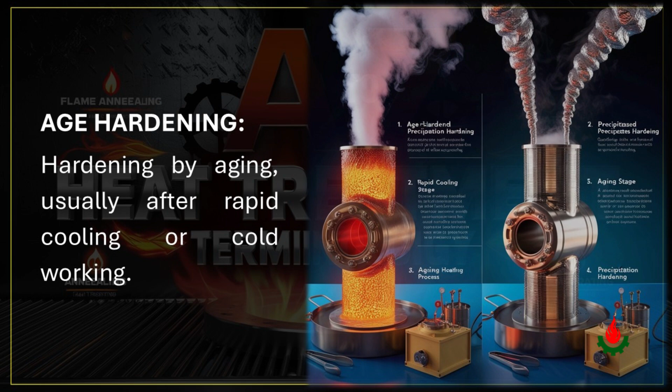Age hardening: hardening by aging, usually after rapid cooling or cold working. Age softening: spontaneous decrease of strength and hardness that takes place at room temperature in certain strain-hardened alloys, especially those of aluminum.

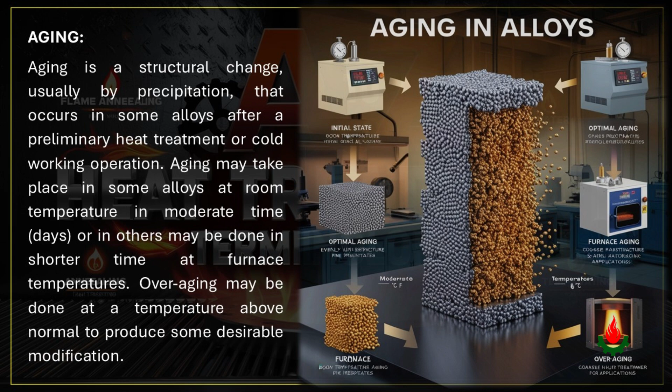Aging is a structural change, usually by precipitation, that occurs in some alloys after preliminary heat treatment or cold working operation. Aging may take place in some alloys at room temperature in moderate time, days, or in others may be done in shorter time at furnace temperatures. Overaging may be done at a temperature above normal to produce some desirable modification.

Air hardening steel: a steel containing sufficient carbon and other alloying elements to harden fully during cooling in air or other gaseous mediums from a temperature above its transformation range. The term should be restricted to steels capable of being hardened by cooling in air in large sections, about 2 inches, 50 millimeters, or more in diameter.

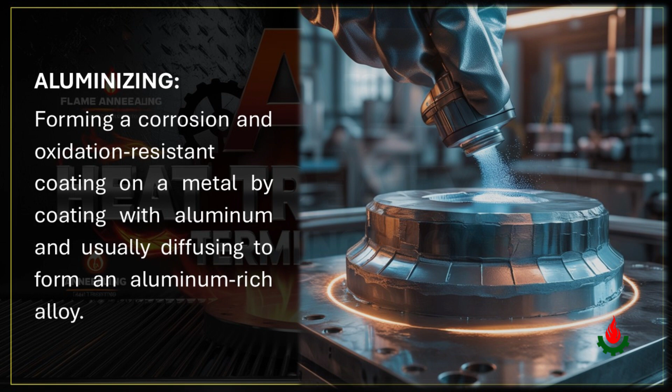Same as self-hardening steel. Aluminizing: forming a corrosion and oxidation-resistant coating on a metal by coating with aluminum and usually diffusing to form an aluminum-rich alloy.

Annealing: a very general term describing the heating of metal to a suitable temperature, holding for a suitable time, and cooling at a suitable rate to accomplish the objective of the treatment.

Annealing may be done to: A. Relieve stresses. B. Induce softness. C. Improve physical, electrical, or magnetic properties. D. Improve machinability. E. Refine the crystalline structure. F. Remove gases. G. Produce a specific microstructure.

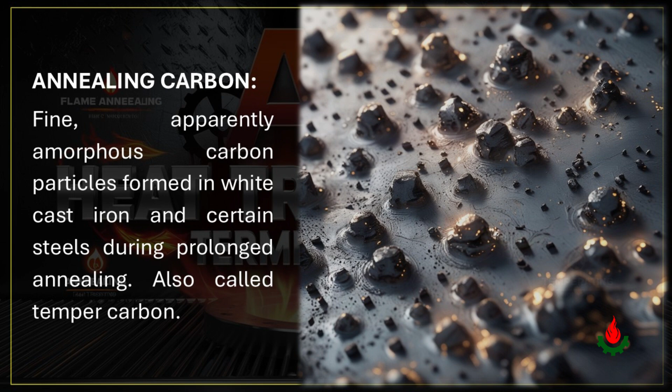Annealing carbon: fine, apparently amorphous carbon particles formed in white cast iron and certain steels during prolonged annealing. Also called temper carbon.

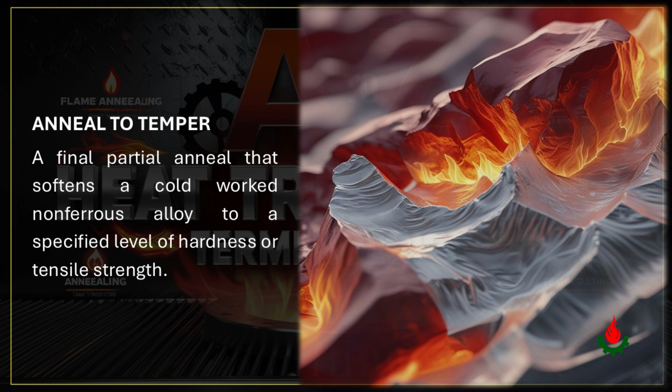Annealing twin: a twin formed in a crystal during recrystallization. Anneal to temper: a final partial anneal that softens a cold-worked non-ferrous alloy to a specified level of hardness or tensile strength.

Anodizing: the production of an oxide layer on aluminum alloys. The process is electrolytic, a typical electrolyte being sulfuric acid. Treatment at room temperature produces thin, decorative layers with some corrosion protection.

Treatment at 0 degrees Celsius produces hard, thicker layers, up to 100 micrometers, with wear resistance. They can be post-sealed to give improved corrosion resistance.

Artificial aging: aging above room temperature. Compare with natural aging. Athermal transformation: a reaction that proceeds without benefit of thermal fluctuations, that is, thermal activation is not required.

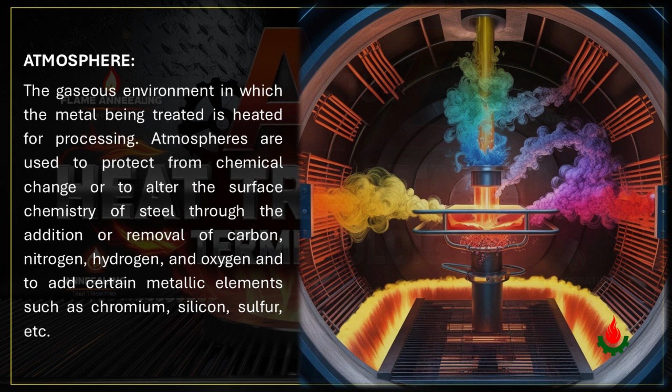Atmosphere: the gaseous environment in which the metal being treated is heated for processing. Atmospheres are used to protect from chemical change or to alter the surface chemistry of steel through the addition or removal of carbon, nitrogen, hydrogen, and oxygen, and to add certain metallic elements such as chromium, silicon, sulfur, etc.

Austempering: a heat treatment for ferrous alloys in which a part is quenched from the austenitizing temperature at a rate fast enough to avoid formation of ferrite or pearlite, and then held at a temperature just above MS until transformation to bainite is complete.

Austenite is the name given to any solid solution in which gamma iron is the solvent. Austenite is a structure name and means nothing as to composition. Austenite is the structure from which all quenching heat treatments must start, which is characterized by a face-centered cubic structure.

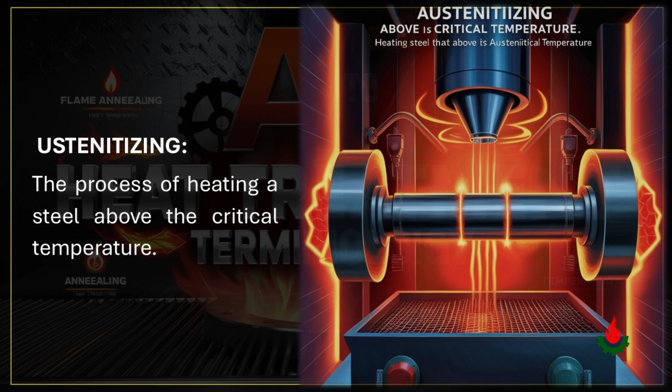Austenitizing: the process of heating a steel above the critical temperature. Bainite: the product formed when austenite transforms between 450 degrees Fahrenheit and 900 degrees Fahrenheit. Bainite is an acicular aggregate of ferrite and carbide and varies in hardness between Rockwell scale 30 and 55.

Baking: 1. Heating to a low temperature to remove gases. 2. Curing or hardening surface coatings such as paints by exposure to heat. 3. Heating to drive off moisture, as in the baking of sand cores after molding.

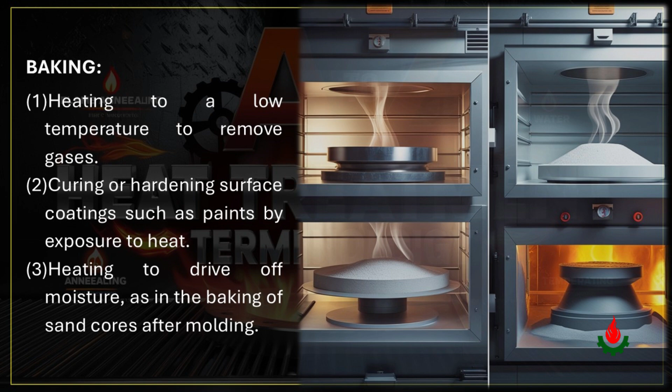Bark: an older term used to describe the decarburized skin that develops on steel bars heated in a non-protective atmosphere. Blasting: a pressurized stream of some materials, glass, plastic, metal, etc., applied on a surface to clean and/or roughen. It can be, depending on the media, abrasive or non-abrasive.

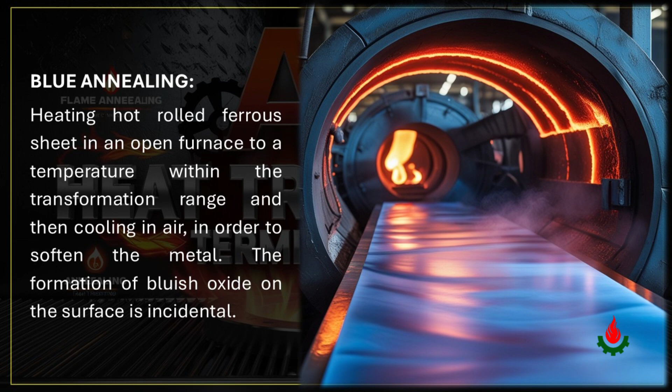Blue annealing: heating hot rolled ferrous sheet in an open furnace to a temperature within the transformation range, and then cooling in air in order to soften the metal. The formation of bluish oxide on the surface is incidental.

Bluing: subjecting the scale-free surface of a ferrous alloy to the action of air, steam, or other agents at a suitable temperature, thus forming a thin blue film of oxide and improving the appearance and resistance to corrosion.

Note: this term is ordinarily applied to sheet, strip, or finished parts. It is used also to denote the heating of springs after fabrication to improve their properties.

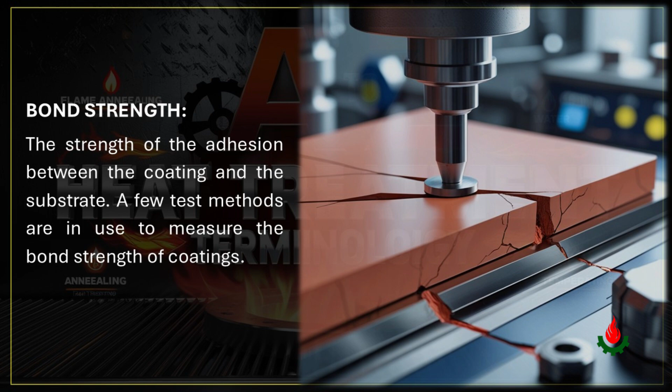Bond strength: the strength of the adhesion between the coating and the substrate. A few test methods are in use to measure the bond strength of coatings.

Boronizing: the diffusion of boron into the surface of a component, usually steel, by a high temperature, approximately 900 degrees Celsius, gas or pack process. It produces hard phases within the surface, typically 100 micrometers deep.

Bright annealing: annealing work in a protective atmosphere so that there is no discoloration as a result of heating. In some atmospheres, oxides may be reduced.

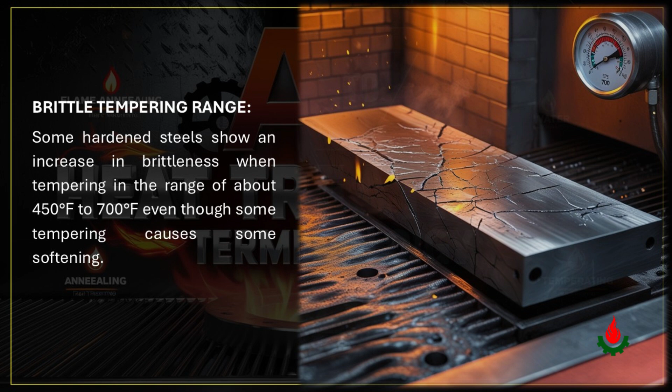Brittle tempering range: some hardened steels show an increase in brittleness when tempering in the range of about 450 degrees Fahrenheit to 700 degrees Fahrenheit, even though some tempering causes some softening.

Carbonitriding: a case hardening process in which a suitable ferrous material is heated above the lower transformation temperature in a gaseous atmosphere of such composition as to cause simultaneous absorption of carbon and nitrogen by the surface and, by diffusion, create a concentration gradient. The process is completed by cooling at a rate that produces the desired properties in the workpiece. Carbon steel, which is essentially iron plus carbon with no intentionally added alloy.

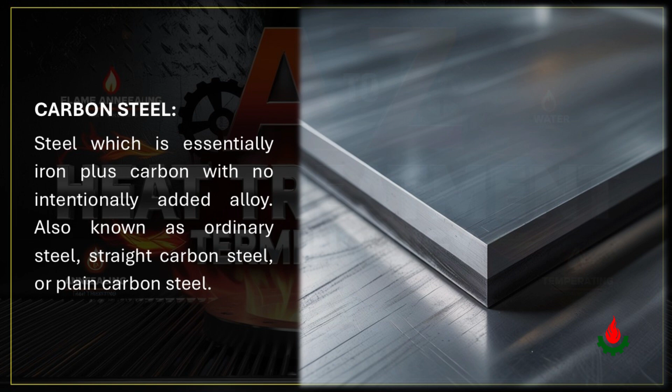Also known as ordinary steel, straight carbon steel, or plain carbon steel.

Carburizing: absorption and diffusion of carbon into solid ferrous alloys by heating to a temperature usually above Ac3, in contact with a suitable carbonaceous material. A form of case hardening that produces a carbon gradient extending inward from the surface, enabling the surface layer to be hardened either by quenching directly from the carburizing temperature or by cooling to room temperature, then re-austenitizing and quenching.

Case: the surface layer of a steel whose composition has been changed by the addition of carbon, nitrogen, chromium, or other material at high temperature.

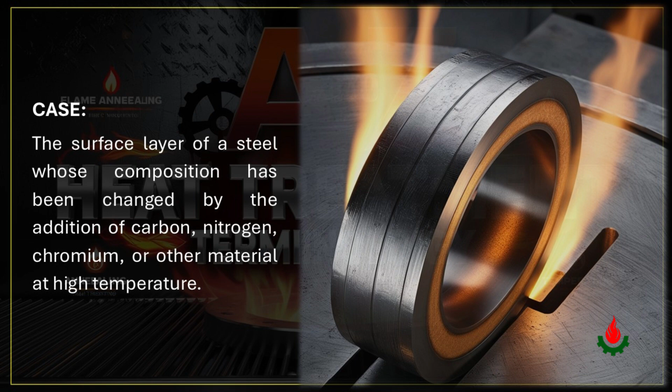Case hardening: a generic term covering several processes applicable to steel that change the chemical composition of the surface layer by absorption of carbon, nitrogen, or a mixture of the two and, by diffusion, create a concentration gradient. The processes commonly used are carburizing and quench hardening, cyaniding, nitriding, and carbonitriding. The use of the applicable specific process name is preferred.

Cementite: the common name for iron carbide, Fe3C, the chemical combination of iron and carbon.

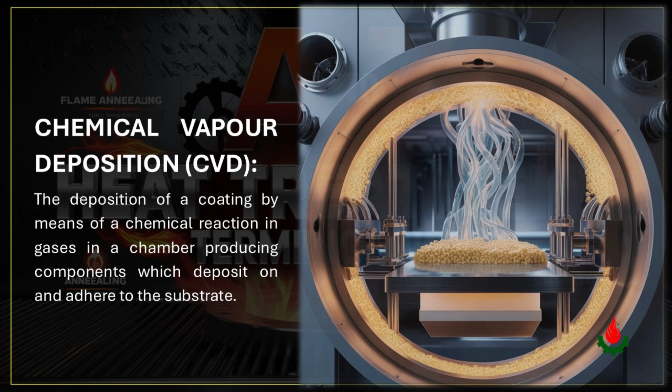Chemical vapor deposition, CVD: the deposition of a coating by means of a chemical reaction in gases in a chamber, producing components which deposit on and adhere to the substrate.

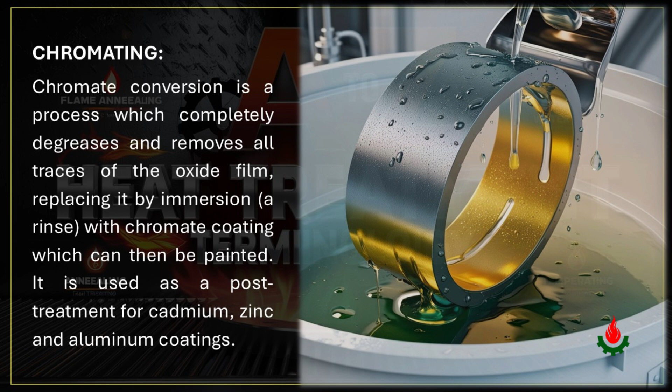Chromating: chromate conversion is a process which completely degreases and removes all traces of the oxide film, replacing it by immersion, a rinse, with chromate coating which can then be painted. It is used as a post-treatment for cadmium, zinc, and aluminum coatings.

Chromizing: high temperature, approximately 900 degrees Celsius, pack or gaseous diffusion of chromium into the surface of a component to enhance high-temperature corrosion and oxidation resistance.

Coating: the application of a thin, generally less than 1 millimeter, layer of material onto the surface of a substrate.

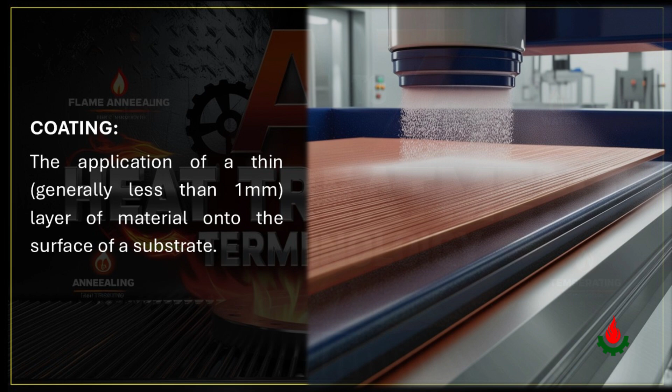Cold working: plastic deformation of a metal at a temperature low enough so that recrystallization does not occur during cooling.

Controlled atmosphere furnace heat treatment: a furnace used for heat treatment of tool steels where the atmosphere is generated outside the furnace and introduced into the heating chamber in such a way as to allow positive control. One of the distinguishing features of this furnace is that the moisture content of the atmosphere is controllable.

The presence of water vapor in the furnace will have a profound effect on both the tendency for decarburization and scaling. These atmospheres are almost always produced by endothermic generators.

Core: the interior part of a steel whose composition has not been changed in a case hardening operation.

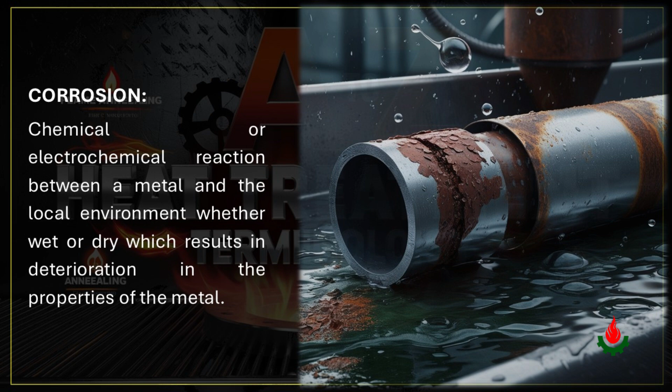Corrosion: chemical or electrochemical reaction between a metal and the local environment, whether wet or dry, which results in deterioration in the properties of the metal.

Critical cooling rate: the rate of continuous cooling required to prevent undesirable transformation. For steel, it is the minimum rate at which austenite must be continuously cooled to suppress transformations above the Ms temperature.

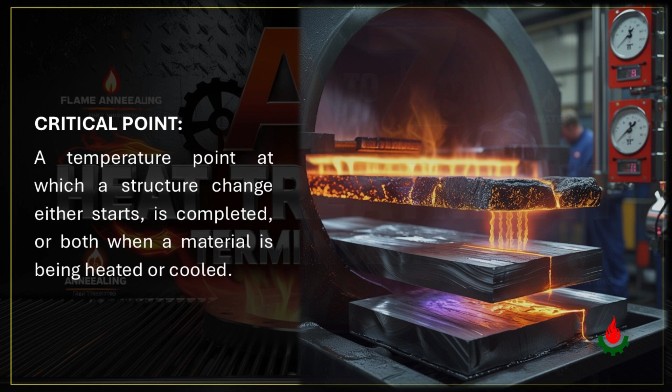Critical point: a temperature point at which a structure change either starts, is completed, or both, when a material is being heated or cooled.

Critical range: the temperature range between an upper and lower critical point for a given material.

Critical temperature: that temperature during heating at which a phase transformation takes place and austenite is formed. Same as critical point or transformation temperature.

Decarburizing: the process, usually unintentional, of removing carbon from the surface of a steel, usually at high temperature, when in contact with certain types of atmospheres.

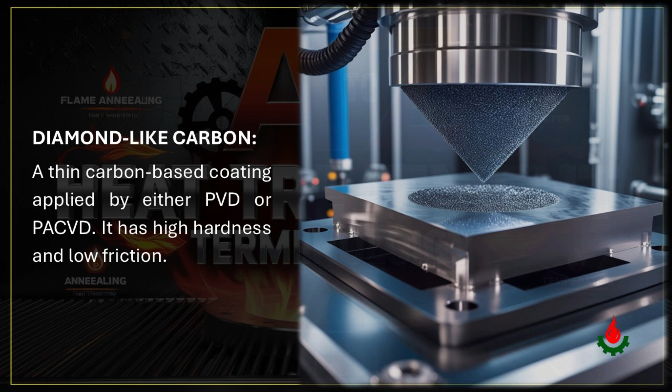Diamond-like carbon: a thin carbon-based coating applied by either PVD or PACVD. It has high hardness and low friction.

Diffusion: 1. Spreading of a constituent in a gas, liquid, or solid tending to make the composition of all parts uniform. The spontaneous movement of atoms or molecules to a new site within a material.

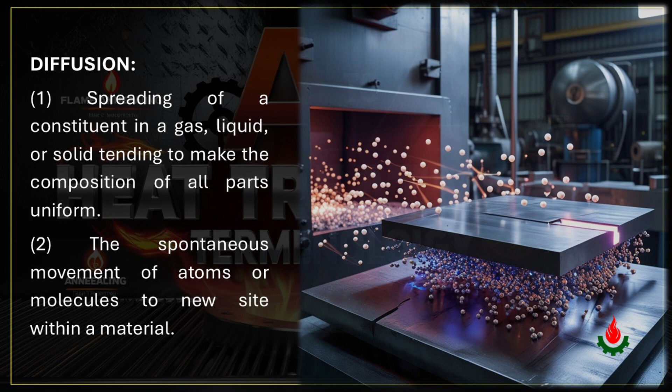Dissociation: the chemical breakdown of a compound into simpler compounds or elements. One of the most common examples is the dissociation of ammonia, NH3, into nitrogen and hydrogen.

Draw: the common term used interchangeably with tempering.

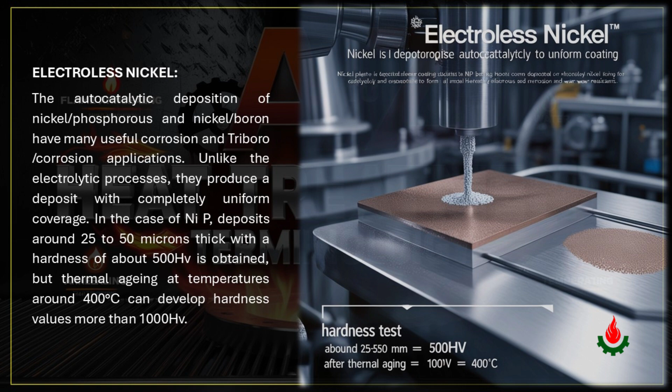Electroless nickel: the autocatalytic deposition of nickel, phosphorus, and nickel boron have many useful corrosion and tribocorrosion applications. Unlike electrolytic processes, they produce a deposit with completely uniform coverage. In the case of Ni-P, deposits around 25 to 50 microns thick with a hardness of about 500 HV are obtained, but thermal aging at temperatures around 400 degrees Celsius can develop hardness values more than 1000 HV.

Electroplating: the application of a layer of metal onto a substrate in a conducting solution of metal salts.

Embrittlement: reduction in the normal ductility of a metal due to a physical or chemical change. Examples include blue brittleness, hydrogen embrittlement, and temper brittleness.

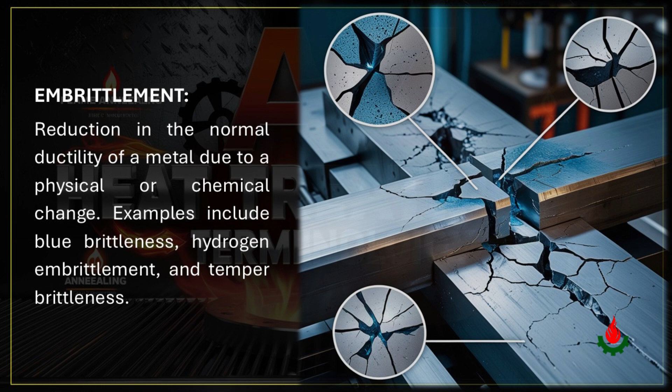Equilibrium diagram: a graphical representation of the temperature, pressure, and composition limits of phase fields in an alloy system as they exist under conditions of complete equilibrium. In metal systems, pressure is usually considered constant.

Equotip hardness tester: a portable hardness tester which takes measurements on the surface of metals in L values which read directly from the digital display unit. This tester reports L value hardness by measuring a velocity change when a spring-propelled tungsten carbide test tip impacts a metal surface and rebounds therefrom. Conversion curves have been developed for steel, which permit the L value to be displayed in the conventional Rockwell, Brinell, Vickers, and Shore hardness scales.

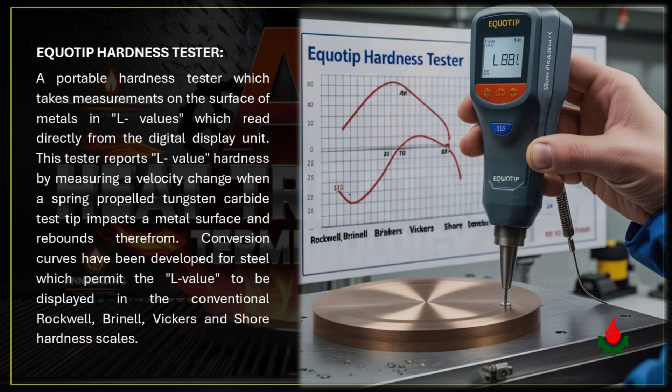Erosion: removal of material from a surface caused by the flow of particles within a liquid or gas.

Eutectoid: 1. An isothermal reversible reaction in which a solid solution is converted into two or more intimately mixed solids on cooling, the number of solids formed being the same as the number of components in the system. 2. An alloy having the composition indicated by the eutectoid point on an equilibrium diagram. 3. An alloy structure of intermixed solid constituents formed by a eutectoid reaction.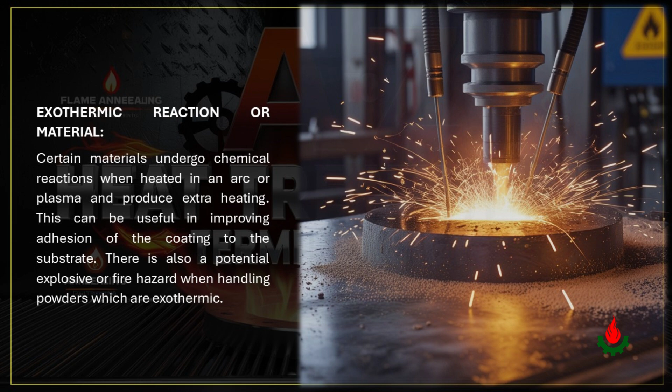Exothermic reaction or material: certain materials undergo chemical reactions when heated in an arc or plasma and produce extra heating. This can be useful in improving adhesion of the coating to the substrate. There is also a potential explosive or fire hazard when handling powders which are exothermic.

Fatigue: failure by progressive fracture caused by repeated applications or reversals of stress.

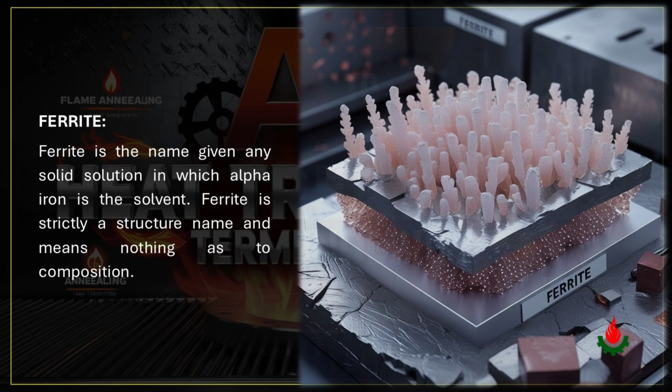Ferrite is the name given to any solid solution in which alpha iron is the solvent. Ferrite is strictly a structure name and means nothing as to composition.

File hardness: hardness is determined using a file of standardized hardness on the assumption that a material that cannot be cut with the file is as hard as, or harder than, the file. Files covering a range of hardness may be employed.

Flame hardening, surface hardening: a controlled process consisting of heating a desired localized area with oxyfuel burners to high temperature, and then quenching to produce a desired hardness. Several types of flame hardening are available: spot stationary hardening, progressive spinning, and drop quench.

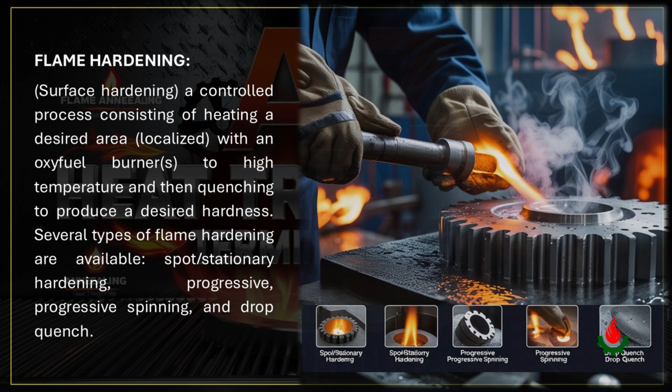Full annealing: an imprecise term that denotes an annealing cycle to produce minimum strength and hardness. For the term to be meaningful, the composition and starting condition of the material and the time-temperature cycle used must be stated.

Galling: damage to the surfaces of materials sliding in contact with each other, usually caused by the localized welding together of high spots. Common for materials like stainless steel, aluminum alloys, and titanium.

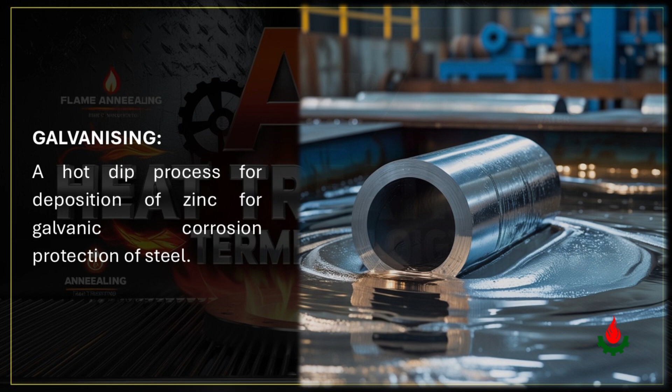Galvanizing: a hot dip process for deposition of zinc for galvanic corrosion protection of steel.

Grain growth: growth of some grains at the expense of others, resulting in an overall increase in average grain size.

Grain size: for metals, a measure of the areas or volumes of grains in a polycrystalline material, usually expressed as an average when the individual sizes are uniform. In metals containing two or more phases, the grain size refers to that of the matrix unless otherwise specified. Grain sizes are reported in terms of number of grains per unit area or volume, average diameter, or as a grain size number derived from area measurements.

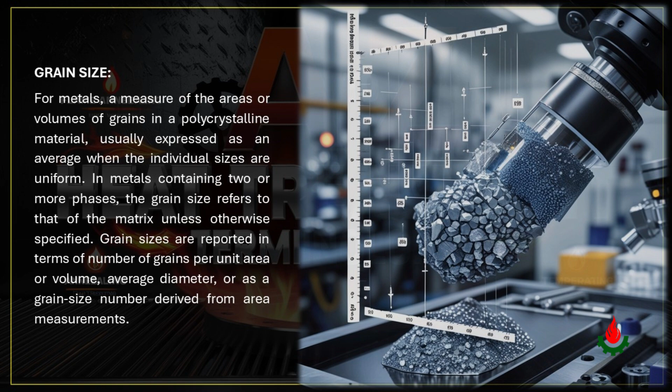Hardenability: the fundamental characteristic of a steel which determines the ease of preventing the transformation of austenite to anything else but martensite during the quench.

Hard chrome plating: the electrolytic deposition of chromium to form a very hard, 1000 HV, tough coating with good wear resistance. The structure is micro-cracked.

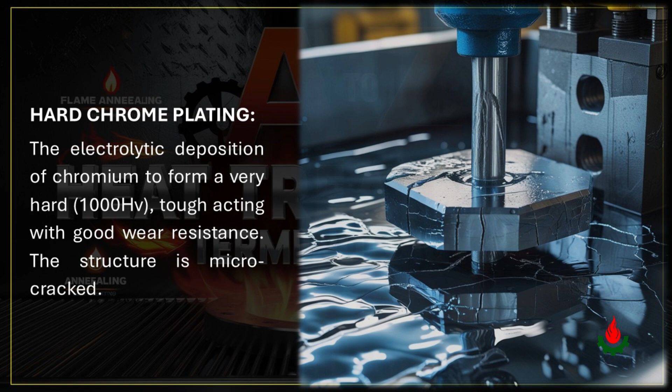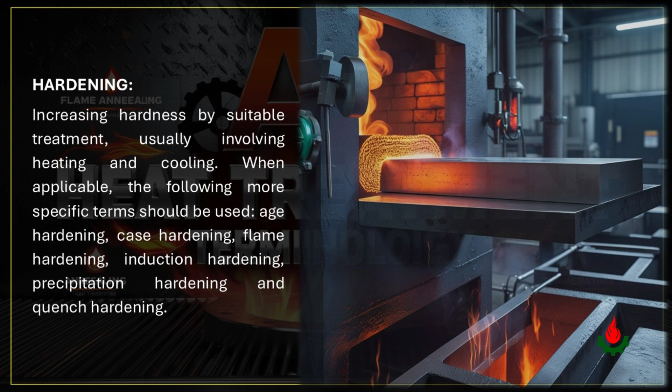Hardening: increasing hardness by suitable treatment, usually involving heating and cooling. When applicable, the following more specific terms should be used: age hardening, case hardening, flame hardening, induction hardening, precipitation hardening, and quench hardening.

Hardness test: a test designed to assess the resistance to penetration from a load. The surface is indented under a defined load, and the depth of penetration is observed.

Heat treatment: heating and cooling a solid metal or alloy in such a way as to obtain desired conditions or properties. Heating for the sole purpose of hot working is excluded from the meaning of this definition.

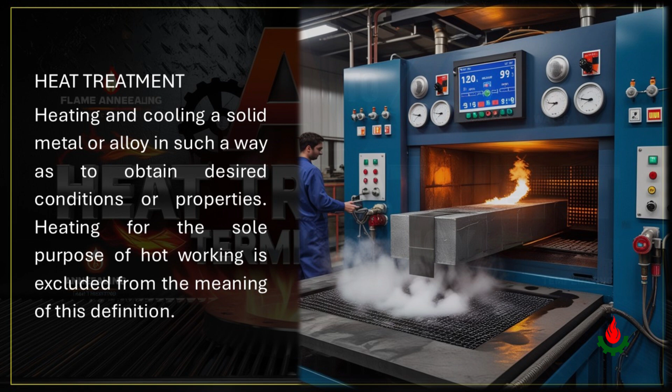Homogenizing: an annealing treatment at fairly high temperature designed to eliminate or reduce chemical segregation.

Hydrogen embrittlement: the brittleness induced in steel by the absorption of hydrogen, most commonly from a pickling or plating operation.

Inclusions: particles of impurities, usually oxides, sulfates, silicates, and such, which separate from the liquid steel and are mechanically held during solidification. In some grades of steel, inclusions are made intentionally high to aid machinability.

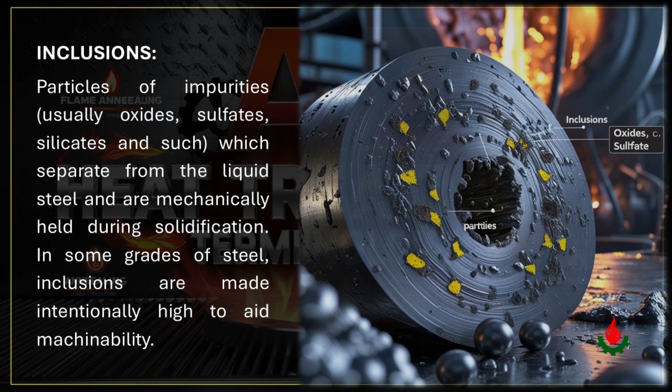Induction hardening: a form of hardening in which the heating is done by induced electrical current. The localized surface heating of a medium carbon steel by an induction coil so that the temperature is raised above 900 degrees Celsius. The part is quenched, or self-quenches by virtue of the remaining cool bulk of the component, and tempered to produce a martensitic structure at the surface.

Ion implantation: a process in which a beam of positive ions is projected towards and into the surface. It is carried out in partial vacuum, and the ions diffuse into the surface layer of the substrate. Typically, this is carried out with nitrogen, giving a nitride effect.

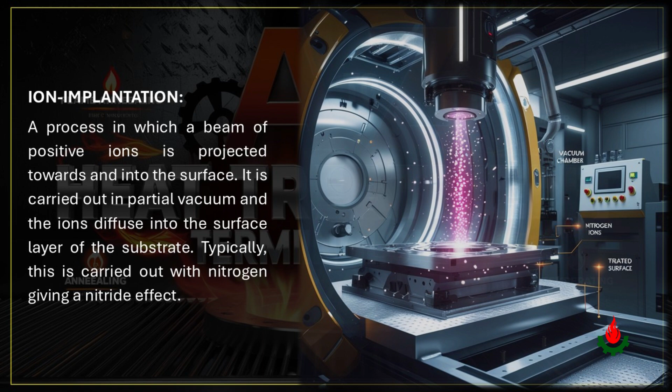Interrupted quench: stopping the cooling cycle at a predetermined temperature and holding at this temperature for a specific time before cooling to room temperature. Usually done to minimize the likelihood of cracking or to produce a particular structure in the part. Isothermal treatment: a type of treatment in which a part is quenched rapidly down to a given temperature, then held at that temperature until all transformation is complete.

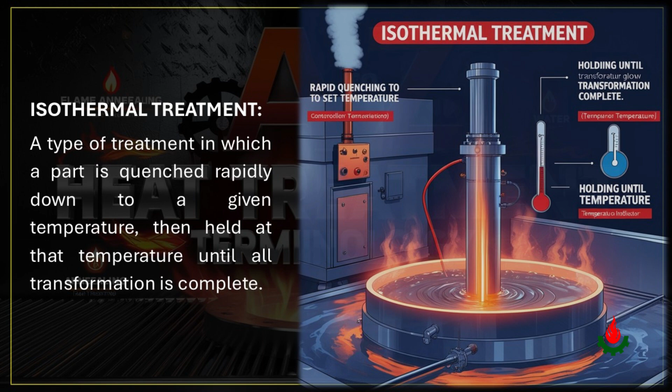Jominy test: see end quench hardenability test.

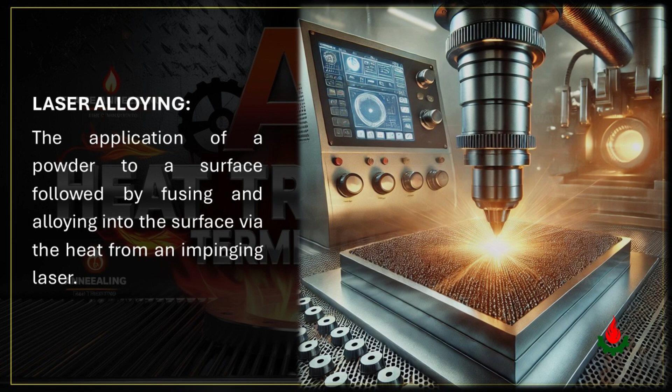Laser alloying: the application of a powder to a surface followed by fusing and alloying into the surface via the heat from an impinging laser. Laser glazing: the melting and quenching of a surface to form a fine-grained structure or glaze.

Laser hardening: the localized surface heating of a medium carbon steel by an incident laser so that the temperature is raised above 900 degrees Celsius. The part is quenched, or self-quenches by virtue of the remaining cool bulk of the component, and tempered to produce a hard martensitic structure at the surface.

Magnetron sputtering, see sputtering. In this PVD process, the sputtering action is enhanced by intense magnetic fields.

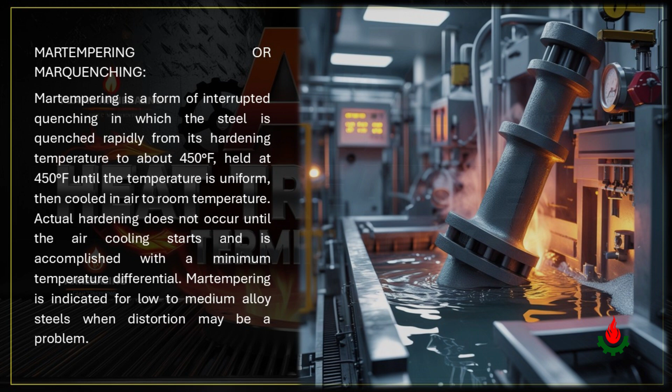Martempering or marquenching: martempering is a form of interrupted quenching, in which the steel is quenched rapidly from its hardening temperature to about 450 degrees Fahrenheit, held at 450 degrees Fahrenheit until the temperature is uniform, then cooled in air to room temperature. Actual hardening does not occur until the air cooling starts, and is accomplished with a minimum temperature differential. Martempering is indicated for low to medium alloy steels when distortion may be a problem.

Martensite: the very hard transformation product which forms from austenite when a steel is quenched and cooled below about 450 degrees Fahrenheit. Technically, martensite can be described as a supersaturated solution of carbon in a tetragonally distorted cubic iron. Under the microscope, it appears as an acicular, or needle-like, structure. Hardness of martensite will vary from Rockwell C30 to Rockwell C68, depending on the carbon content.

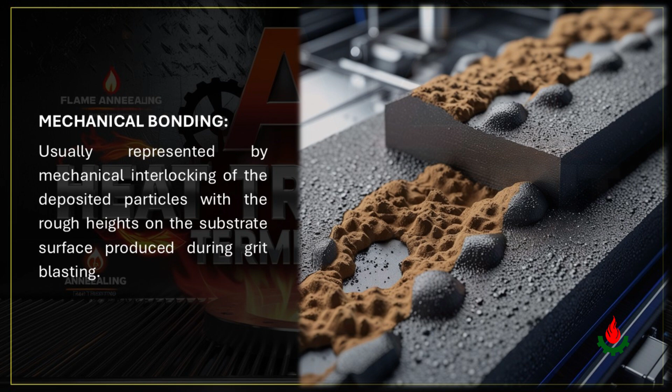Mechanical bonding is usually represented by mechanical interlocking of the deposited particles with the rough heights on the substrate surface produced during grit blasting. Metallurgical bonding is produced by chemical bonding between areas of the coating and substrate in intimate contact, or even by diffusion interaction between the coating and substrate. Metallurgical bonding can be enhanced by post-spraying diffusion heat treatments. Microhardness: the hardness of a coating measured on a microscopic scale.

Microstructure: the structure of a metal as revealed at high magnification, usually at 100x and higher.

Nickel plating: the electrolytic deposition of nickel to form a corrosion barrier or to reclaim a worn part. Can also include hard ceramic particles to form a wear-resistant composite coating.

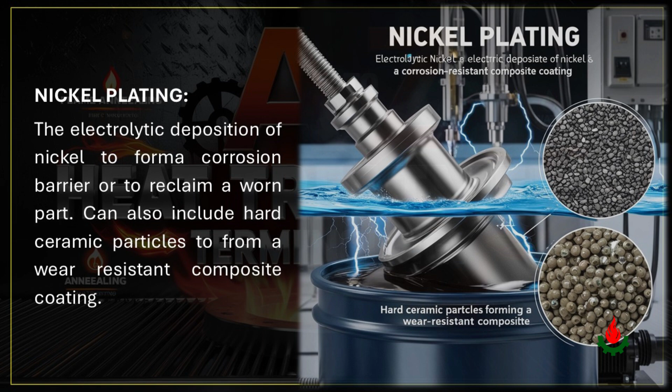Nitriding: the process of adding nitrogen to the surface of a steel, usually from dissociated ammonia as the source. Nitriding develops a very hard case after a long time at comparatively low temperature, without quenching.

Nitrocarburizing: any of several processes in which both nitrogen and carbon are absorbed into the surface layers of a ferrous material at temperatures below the lower critical temperature, and by diffusion create a concentration gradient. Nitrocarburizing is done mainly to provide an anti-scuffing surface layer and to improve fatigue resistance.

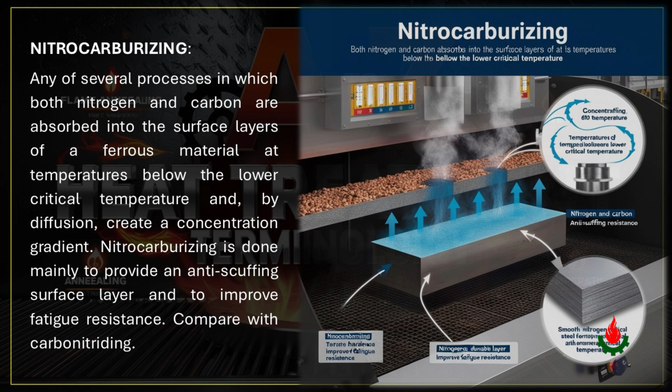Compare with carbonitriding. Normalizing: the process of heating steel to a temperature above its transformation range, followed by air cooling. The purpose of normalizing may be to refine grain structure prior to hardening the steel, to harden the steel slightly, or to reduce segregation in castings or forgings.

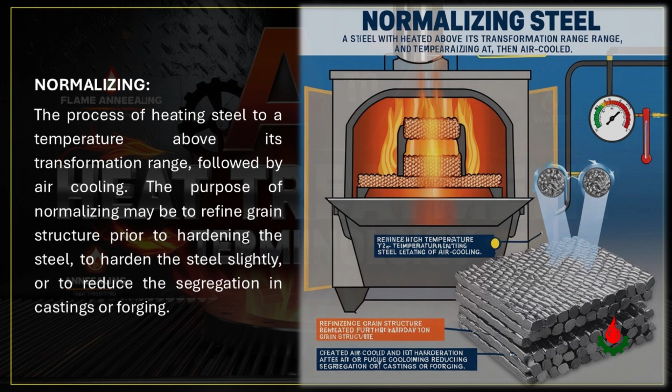Overheating: heating a metal or alloy to such a high temperature that its properties are impaired. When the original properties cannot be restored by further heat treating, by mechanical working, or by a combination of working and heat treating, the overheating is known as burning.

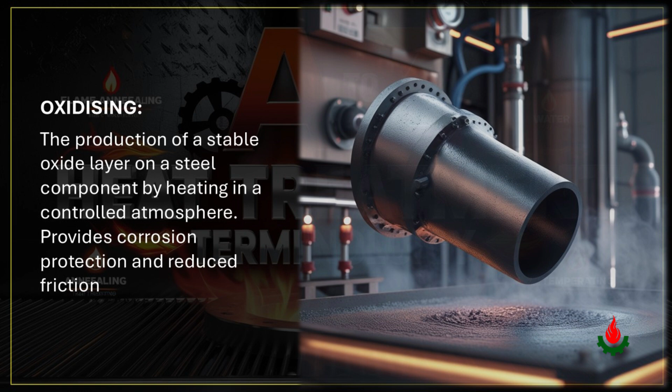Oxidation: chemical reaction between the surface elements and oxygen, causing oxides of the elements to be formed. Oxidizing: the production of a stable oxide layer on a steel component by heating in a controlled atmosphere. Provides corrosion protection and reduced friction.

Passivating: the post-treatment, usually by chromating, of nickel, cadmium, or zinc coatings to reduce their corrosion rates. Pearlite: a metastable lamellar aggregate of ferrite and cementite resulting from the transformation of austenite at temperatures above the bainite range.

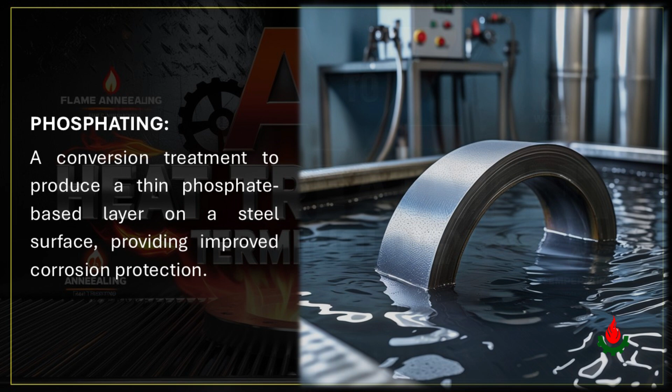Phosphating. A conversion treatment to produce a thin phosphate-based layer on a steel surface, providing improved corrosion protection.

Physical vapor deposition. A term covering all the vapor deposition processes including ion plating. It does not include CVD, as this is chemical, not physical.

Plasma nitriding, also called ion nitriding. A vacuum glow discharge technique of nitriding. See nitriding. Porosity. The presence of pores or voids in a coating, whether connected or not.

Porosity is not the same as pullout.

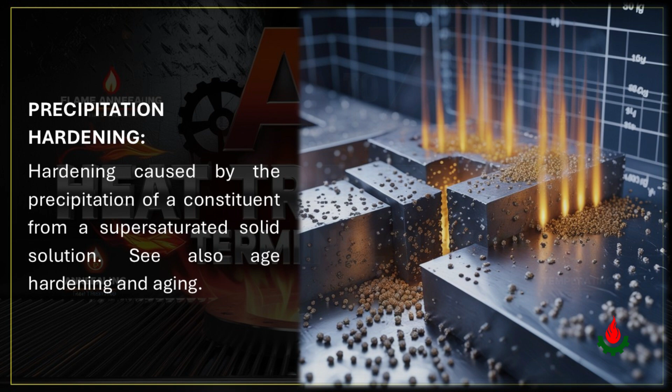Precipitation hardening. Hardening caused by the precipitation of a constituent from a supersaturated solid solution. See also age hardening and aging.

Preheating. Heating before some further thermal or mechanical treatment. For tool steel, heating to an intermediate temperature immediately before final austenitizing. For some non-ferrous alloys, heating to a high temperature for a long time to homogenize the structure before working. In welding and related processes, heating to an intermediate temperature for a short time immediately before welding, brazing, soldering, cutting, or thermal spraying.

Quality control. All aspects of the control of the heat treatment process, including the surface preparation, heat treatment, process control, tests as specified. Quenching. Cooling from high temperature, usually at a fast rate.

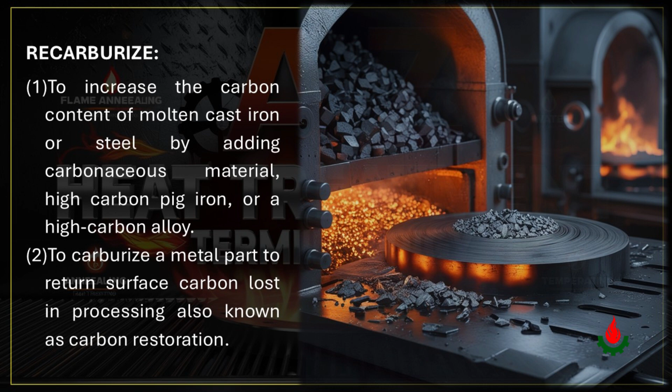Recarburize. 1. To increase the carbon content of molten cast iron or steel by adding carbonaceous material, high-carbon pig iron, or a high-carbon alloy. 2. To carburize a metal part to return surface carbon lost in processing, also known as carbon restoration.

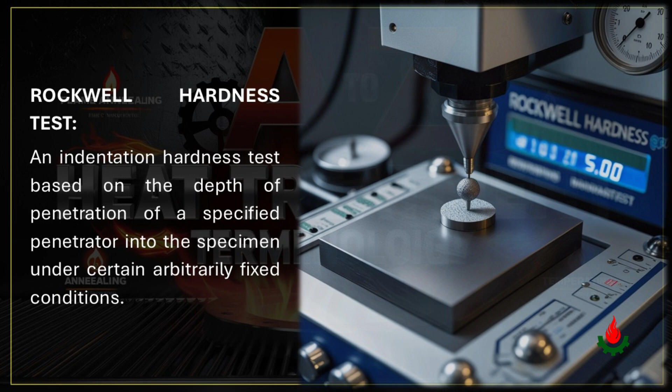Rockwell hardness test. An indentation hardness test based on the depth of penetration of a specified penetrator into the specimen, under certain arbitrarily fixed conditions.

Secondary hardness. The higher hardness developed by certain alloy steels when they are cooled from a tempering operation. This should always be followed by a second tempering operation.

Size distribution. The distribution of sizes within a size analysis. The distribution may be normal or skewed in some way due to the powder manufacturing process.

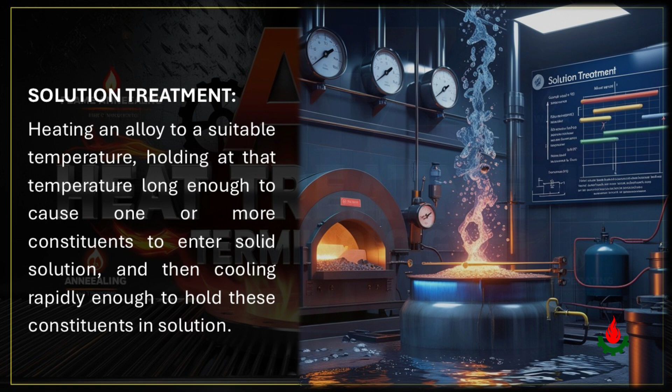Solution treatment. Heating an alloy to a suitable temperature, holding at that temperature long enough to cause one or more constituents to enter solid solution, and then cooling rapidly enough to hold these constituents in solution.

Spalling, the lifting or detachment of a coating from the substrate.

Spheroidizing, a heat-treating process used to change all the carbides in steel to rounded particles, or spheroids. A completely spheroidized structure is the softest and most workable structure for any composition.

Sputtering. This is a glow discharge process whereby bombardment of a cathode releases atoms from the surface, which then deposit onto a nearby target surface to form a coating.

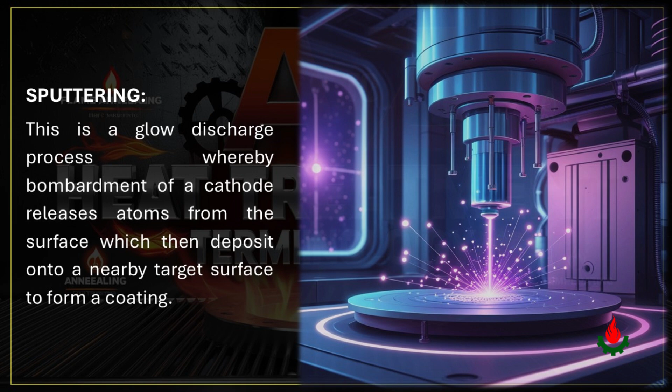Stabilizing treatment. 1. Before finishing to final dimensions, repeatedly heating a ferrous or non-ferrous part to or slightly above its normal operating temperature, and then cooling to room temperature to ensure dimensional stability in service. 2. Transforming retained austenite in quenched hardenable steels, usually by cold treatment.

3. Heating a solution-treated stabilized grade of austenitic stainless steel to 870 to 900 degrees Celsius, 1,600 to 1,650 degrees Fahrenheit, to precipitate all carbon as titanium carbide, niobium carbide, or tantalum carbide, so that sensitization is avoided on subsequent exposure to elevated temperature.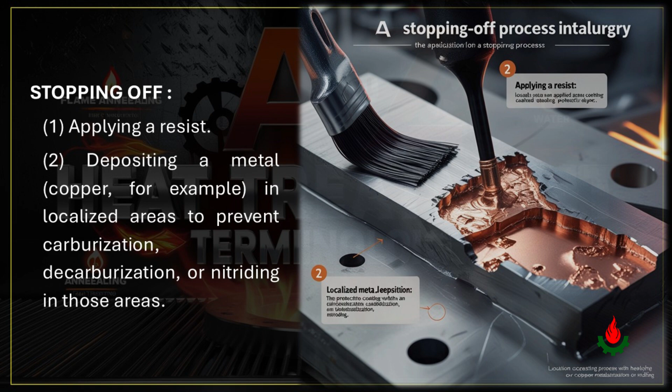Stopping off. 1. Applying a resist. 2. Depositing a metal, copper for example, in localized areas to prevent carburization, decarburization, or nitriding in those areas.

Strain, a measure of the extent to which a body is deformed when it is subjected to a stress. Stress, the force per unit area on a body that tends to cause it to deform. It is a measure of the internal forces in a body between particles of the material of which it consists, as they resist separation, compression, or sliding.

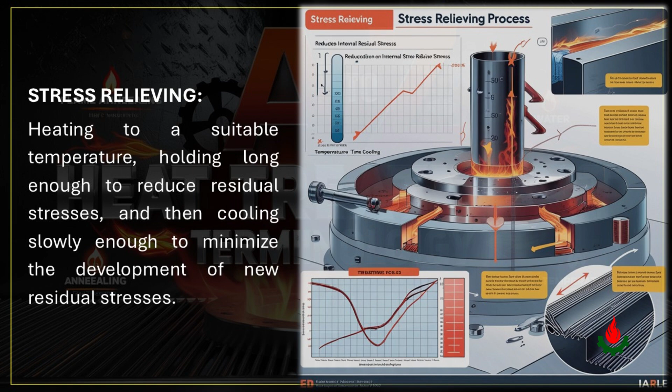Stress relieving. Heating to a suitable temperature, holding long enough to reduce residual stresses, and then cooling slowly enough to minimize the development of new residual stresses.

Substrate, the parent or base material to which the coating is applied.

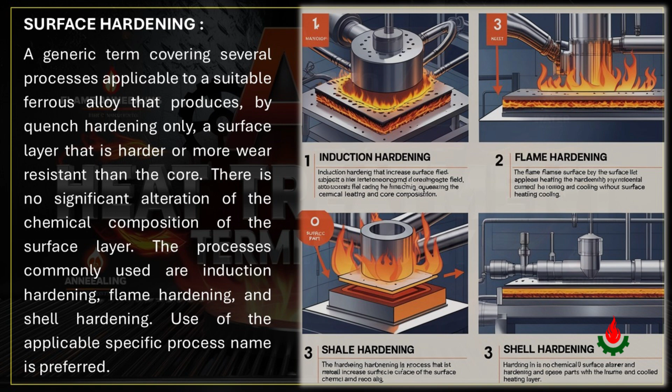Surface hardening, a generic term covering several processes applicable to a suitable ferrous alloy that produces, by quench hardening only, a surface layer that is harder or more wear-resistant than the core. There is no significant alteration of the chemical composition of the surface layer. The processes commonly used are induction hardening, flame hardening, and shell hardening. Use of the applicable specific process name is preferred.

Surface preparation. Cleaning and roughening the surface to be sprayed, usually by grit or bead blasting. This is to increase the adhesion of the coating to the substrate.

Tarnish. Surface discoloration of a metal caused by formation of a thin film of corrosion product.

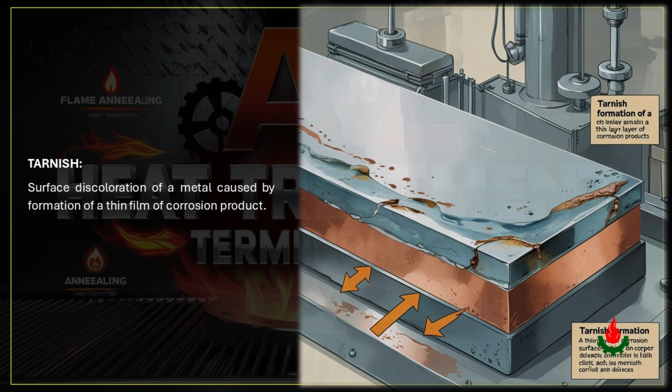Temper. 1. In heat treatment, reheating hardened steel or hardened cast iron to some temperature below the eutectoid temperature for the purpose of decreasing hardness and increasing toughness. The process also is sometimes applied to normalized steel. In tool steels, temper is sometimes used, but inadvisably, to denote the carbon content.

3. In non-ferrous alloys, and in some ferrous alloys, steels that cannot be hardened by heat treatment: the hardness and strength produced by mechanical or thermal treatment or both, and characterized by a certain structure, mechanical properties, or reduction in area during cold working.

Temper brittleness. Brittleness that results when certain steels are held within, or are cooled slowly through, a certain range of temperature below the transformation range.

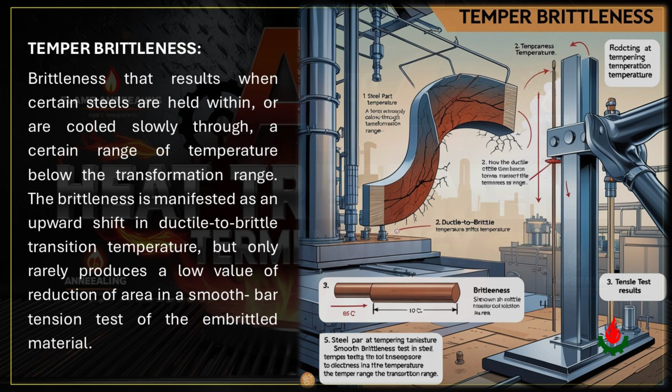The brittleness is manifested as an upward shift in ductile to brittle transition temperature, but only rarely produces a low value of reduction of area in a smooth bar tension test of the embrittled material.

Temper color: a thin, tightly adhering oxide skin, only a few molecules thick, that forms when steel is tempered at a low temperature, or for a short time, in air or a mildly oxidizing atmosphere. The color, which ranges from straw to blue depending on the thickness of the oxide skin, varies with both tempering time and temperature.

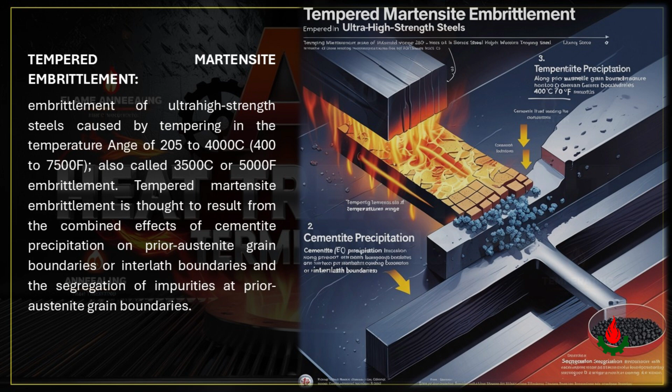Tempered martensite embrittlement: embrittlement of ultra-high-strength steels caused by tempering in the temperature range of 205 to 400 degrees Celsius, 400 to 750 degrees Fahrenheit. Tempered martensite embrittlement is thought to result from the combined effects of cementite precipitation on prior austenite grain boundaries, or interlath boundaries, and the segregation of impurities at prior austenite grain boundaries.

Temper embrittlement: embrittlement of alloy steels caused by holding within or cooling slowly through a temperature range just below the transformation range. Embrittlement is the result of the segregation at grain boundaries of impurities such as arsenic, antimony, phosphorus, and tin. It is usually manifested as an upward shift in ductile to brittle transition temperature. Temper embrittlement can be reversed by retempering above the critical temperature range, then cooling rapidly.

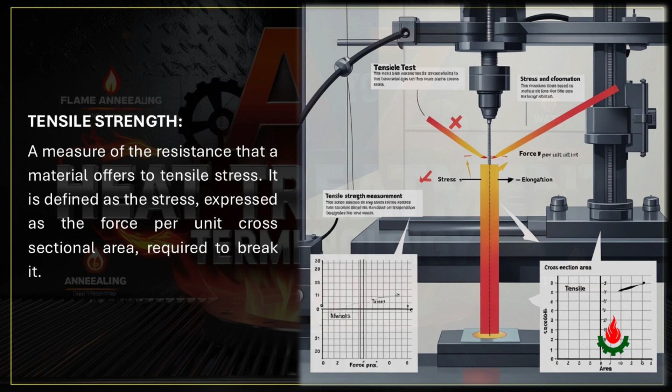Tensile strength: a measure of the resistance that a material offers to tensile stress. It is defined as the stress, expressed as the force per unit cross-sectional area required to break it. Tensile stress: axial forces per unit area applied to a body that tend to extend it.

Thermal embrittlement: intergranular fracture of maraging steels with decreased toughness, resulting from improper processing after hot working. Thermal embrittlement occurs upon heating above 1095 degrees Celsius, 2000 degrees Fahrenheit, and then slow cooling through the temperature range of 815 to 980 degrees Celsius, 1500 to 1800 degrees Fahrenheit, and has been attributed to precipitation of titanium carbides and titanium carbonitrides at austenite grain boundaries during cooling through the critical temperature range.

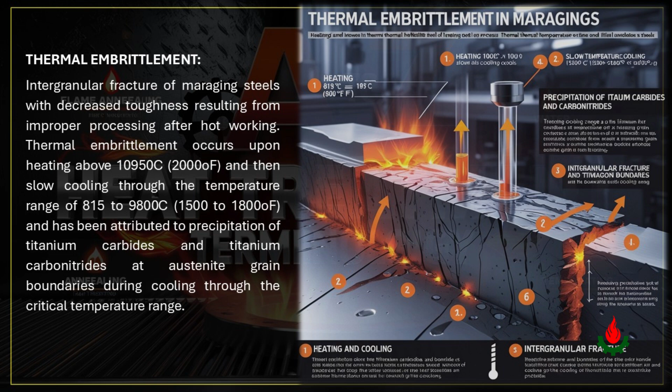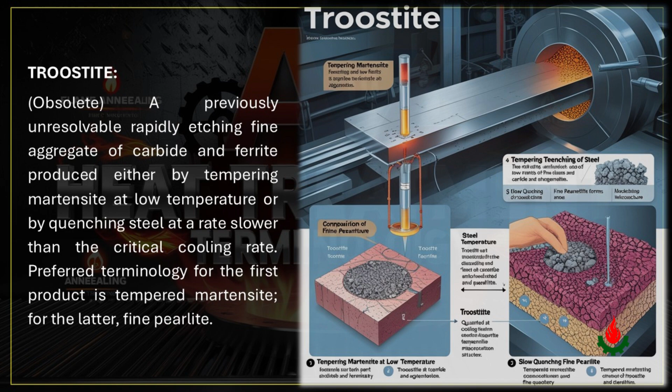Troostite, obsolete: a previously unresolvable, rapidly etching fine aggregate of carbide and ferrite, produced either by tempering martensite at low temperature or by quenching steel at a rate slower than the critical cooling rate. Preferred terminology for the first product is tempered martensite, for the latter, fine pearlite.

Wear: loss of material from a surface by means of relative motion between it and another body. Work hardness: hardness developed in metal resulting from cold working.

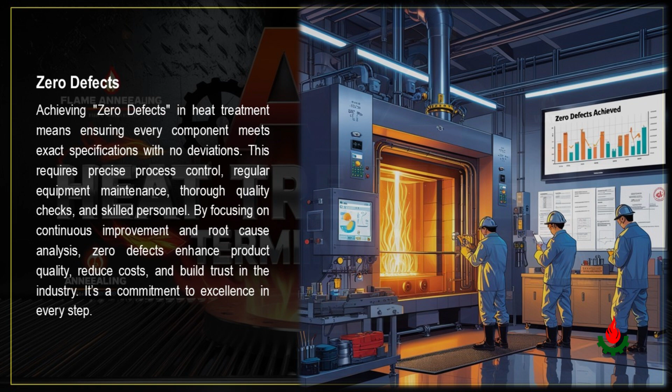Zero defects: achieving zero defects in heat treatment means ensuring every component meets exact specifications with no deviations. This requires precise process control, regular equipment maintenance, thorough quality checks, and skilled personnel. By focusing on continuous improvement and root cause analysis, zero defects enhance product quality, reduce costs, and build trust in the industry. It's a commitment to excellence in every step.

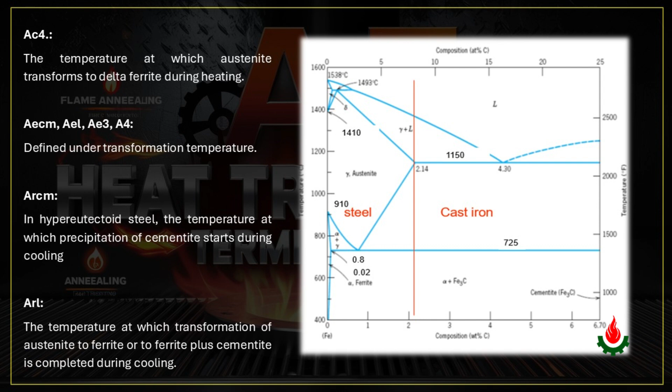AECM, AEL, AE3, A4, defined under transformation temperature. ARCM in hypereutectoid steel: the temperature at which precipitation of cementite starts during cooling. ARL: the temperature at which transformation of austenite to ferrite or to ferrite plus cementite is completed during cooling. AR3: the temperature at which austenite begins to transform to ferrite during cooling. AR4: the temperature at which delta ferrite transforms to austenite during cooling. AR: the temperature at which transformation of austenite to pearlite starts during cooling. MF: the temperature at which martensite formation on cooling is essentially finished.

See transformation temperature for the definition applicable to ferrous alloys. MS: the temperature at which martensite starts to form on cooling. See transformation temperature for the definition applicable to ferrous alloys.